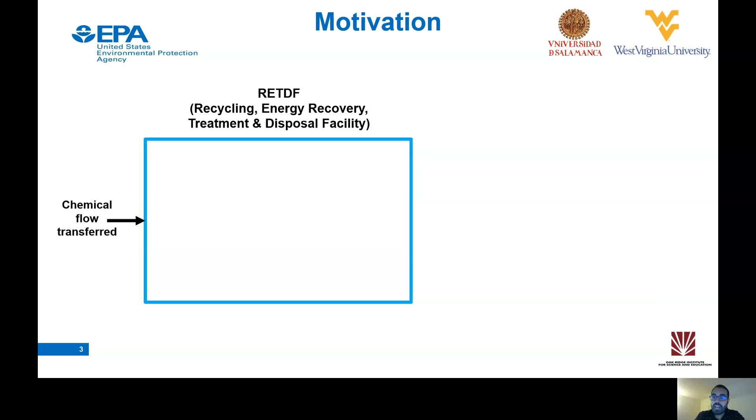In a previous work, in order to support chemical risk evaluation, we developed data engineering for tracking and identifying the recycling, energy recovery, treatment, and disposal facilities, or RETDFs, that received a chemical waste flow transfer, and also we identified the end-of-life exposure scenarios. Now, we are estimating how much of the chemical flow transfer may be released, for example, as a fugitive air emission at the RETDF by using facility level information.

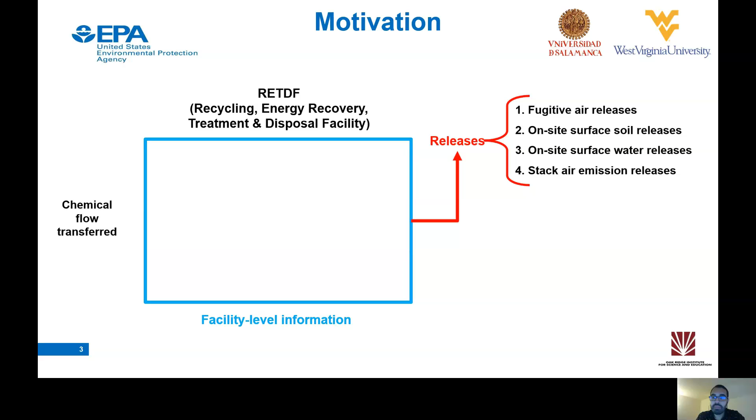However, improving the chemical flow allocation for chemical releases and worker exposure estimation requires knowledge about the pollution abatement unit technologies, or PAU technologies. Therefore, the objective of this work is to incorporate PAU level information to the chemical flow analysis and improve the chemical flow allocation from facility to process unit level, considering potential internal superstructures and flow streams that may be occurring during the end-of-life operation.

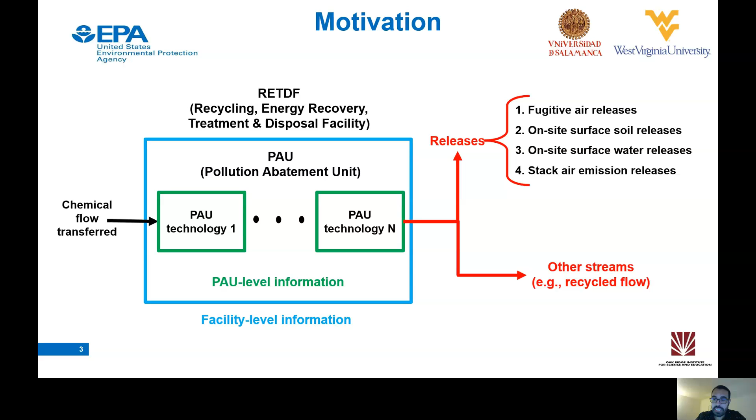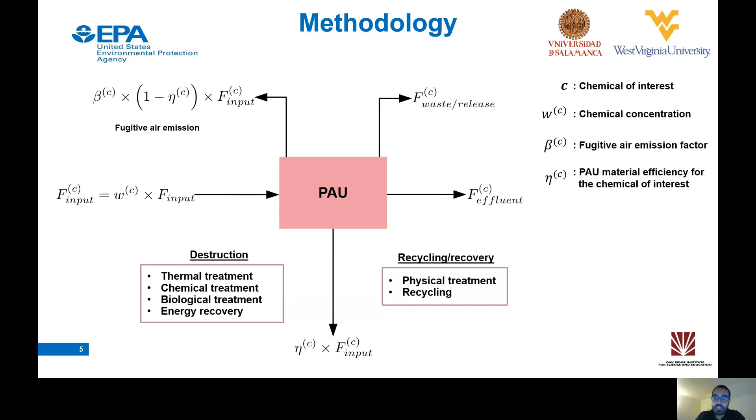Our methodology is based on a generic material balance for a chemical of interest that flows into the PAU technology, thereby allocating the chemical downstream of the operation. For the allocation, we consider the effect of the PAU on the chemical of interest, which is based on the objective of the operation. For example, the objective of a scrubber is to recover a chemical from an input waste stream. Additionally, based on the literature, we identified potential output streams from the PAU technology. For instance, a chemical may end up in a bottom ash or fly ash in an incinerator.

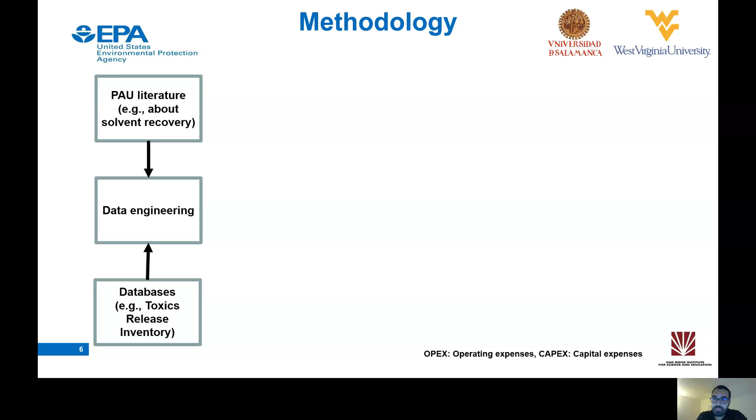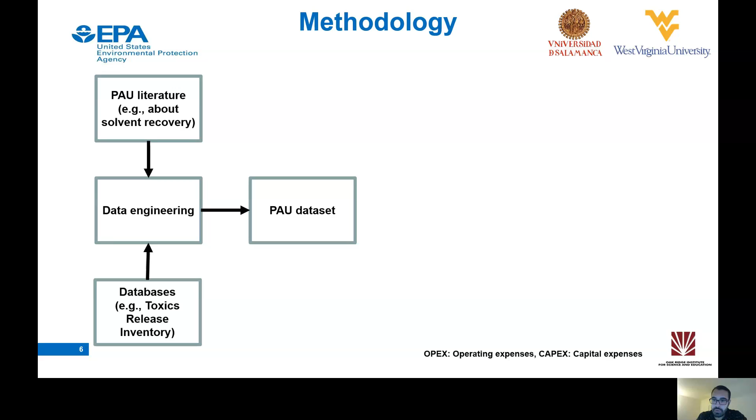Thus, using databases and design configurations like the Toxics Release Inventory, literature about PAU, and environmental regulation, we perform data engineering for transforming the information into a machine-readable structure for future automatization. With this data, we create the PAU dataset, which has features like waste input flow, chemical concentration, etc. Also, we include the unit price of the chemical, and the OPEX and CAPEX, for providing a general and more realistic insight into the type of waste management decision-making criteria.

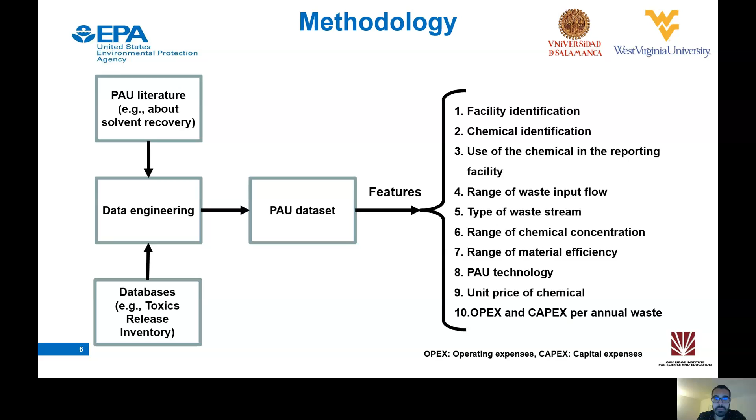Thus, the features in the PAU dataset enable different applications. First, the information can be used for building data-driven models. For example, we can infer about selecting a PAU technology given the required efficiency and chemical concentration. Second, after the prediction or inference, we can use decision-making tools, for example, to select a PAU technology from the potential candidates that may satisfy the desired conditions.

Third, we can perform a material flow analysis. Thus, in our case, we can analyze what happens with a chemical transfer that passes through a RETDF and estimate potential releases and exposure scenarios. Fourth and last application, the release estimates from the material flow analysis and exposure scenarios may support a subsequent exposure assessment.

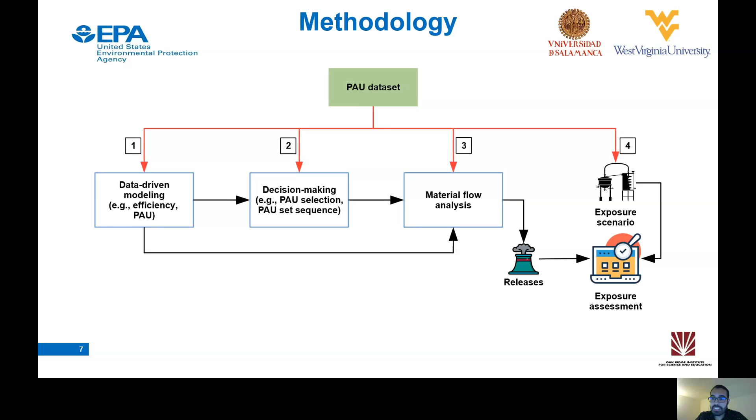On this slide, we can see a generic procedure that we proposed for development of case studies. First, we used a Bayesian network as a data-driven model. The Bayesian network has random variables associated with the type of waste, for example, whether the waste is liquid waste. Also, we included aspects about waste input flow, the input chemical concentration, the PAU technology, the material efficiency, the CapEx, the OpEx, and chemical price. The idea for using this data-driven model was to infer the probability of selecting a PAU technology under the problem specifications presented on the left side of the slide.

Second, we used a fuzzy technique as a multi-criteria decision-making tool for selecting one of those potential PAU technologies. This decision is based on 4 criteria. For instance, we considered whether the same PAU technology could satisfy the pollution abatement requirements for more than one chemical in the same waste stream. Third, the fuzzy inference helps to organize the sequence of PAU technologies. Here, 5 criteria are considered, like the chemical flammability and corrosiveness. Finally, we performed the material flow analysis to estimate the releases, for example, as a fugitive air emission and other output streams.

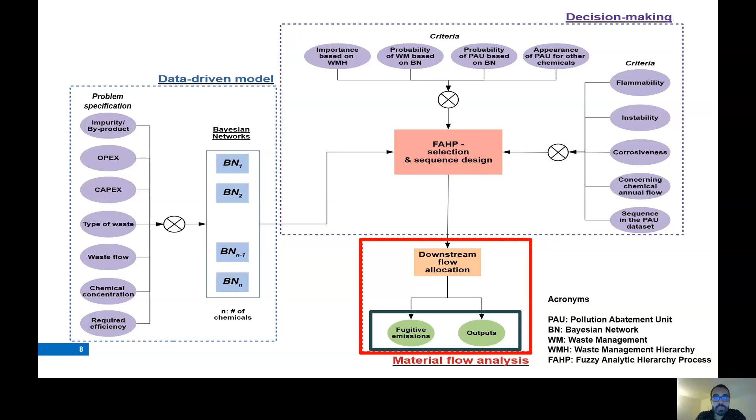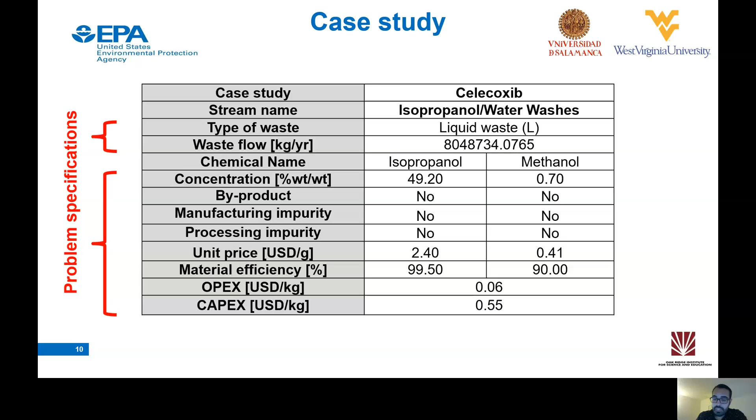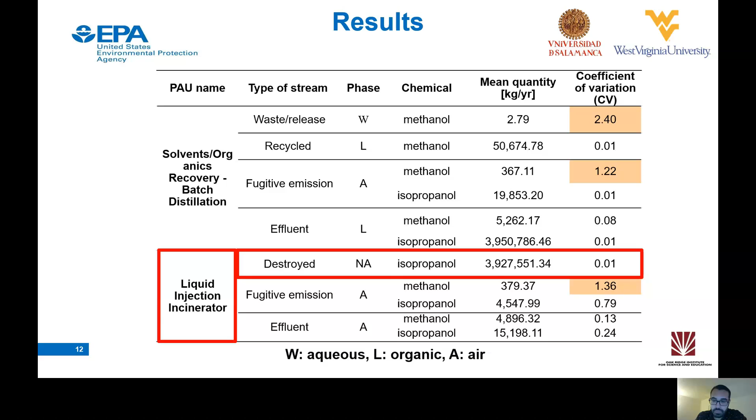So this slide has the case study results by following the procedure I presented before in slide 8. First, we can see for this case study that we can identify the PAU technologies that may satisfy the problem specifications and select one to handle the chemical of interest. So, batch still distillation would handle methanol and liquid injection incinerator isopropanol. Second, we can automatically determine how to construct the sequence of PAU technologies by using fuzzy inference. Thus, batch still distillation is prior to liquid injection incinerator, as presented by the red arrow.

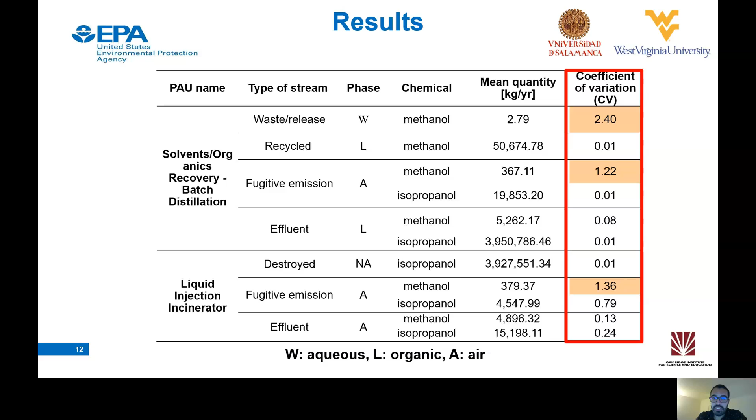Finally, the framework allocates the chemical downstream to each PAU technology, providing the mean value of the chemical flows in each stream, and also the variability of the results represented by the coefficient of variation.

So the conclusion and future direction of this work is: first, the framework can support building a modular approach for data-driven modeling, decision-making, and material flow analysis. Second, the framework can be used to analyze on-site pollution abatement activities. Third, it can be connected to the off-site transfer chemical flow tracking, which was previously developed. We are working on it. Fourth, it can be connected to the circular economy of chemicals. The idea is to track the hazardous chemicals that can flow in a recycled waste flow. We are working on it at this moment. And finally, we need to explore data-driven models for predicting scenarios for chemicals that are not in the data sources.